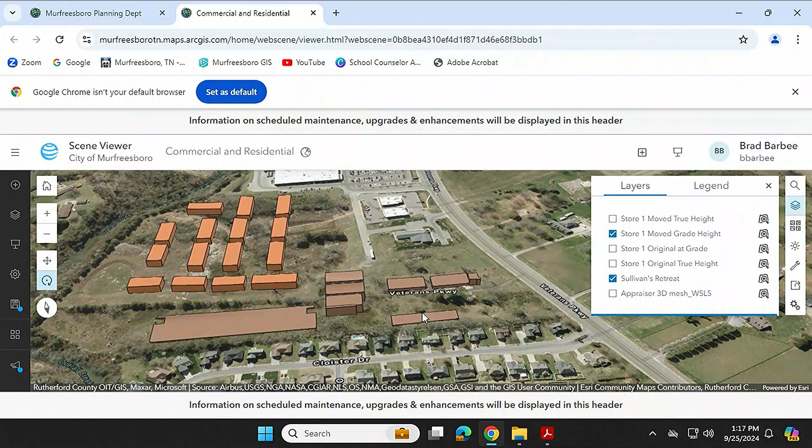They are now providing 100 feet of separation between the cloister and the exterior wall of the self-service storage facility. In addition to providing that distance, our recommendation was also to reduce the level of the building on the side facing the cloister to 1 story. The resubmittal we received was to provide the 100 foot separation and restore the building back to the full 3-story height that was in the very original submittal we received.

Cool. Say that one more time. Are you saying that they're going back to the 3 stories? Yes, sir. The submittal you have before you is for a full 3-story building, but it has been pushed further away from the Cloister subdivision to provide 100 feet of separation.

This image gives you an idea of what this building in the center is, the self-service storage facility. The short structure to the left is the 1-story facility that was previously approved. The structures to the right are the retail spaces that are part of their site plan, and Sullivan's Retreat, which has not been built yet, we have inserted as the orange structures in the rear.

Our GIS department has helped us greatly by producing some 3-dimensional images to give us a good comparison of how the cloister will look adjacent to this. The roof lines of the self-service storage facility do get kind of skewed once they do this. I have confirmed with them that this wall height you're seeing is accurate, and they have requested that you ignore the bizarre roof structure that's shown.

But this gives an image that should reflect how that will appear once constructed, and this is in the new plan. We can give a view from pretty much any angle. If we want to rotate around, there is the Sullivan's Retreat property to the south.

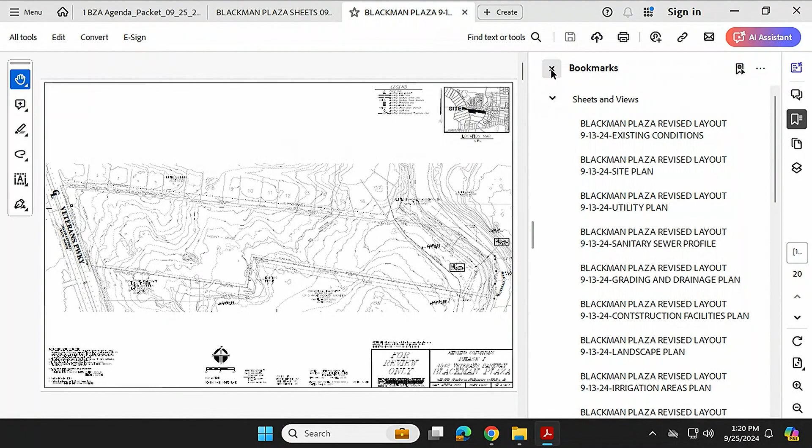Brad, can you remind us of what the buffer is, or any fencing between the cloister and this structure or structures? Yes, sir. They are providing a 15-foot wide type D buffer in addition to a 6-foot tall opaque privacy fence. They are also, with the new site plan, proposing to preserve some additional space and allow them to pull grading off of the northern property line, giving a better chance at preserving existing trees currently in place along this fence row that you can see here.

Actually... oop, that doesn't work anymore. We've also had some adjustments. The loading/unloading area is now on the north side of the building in this area.

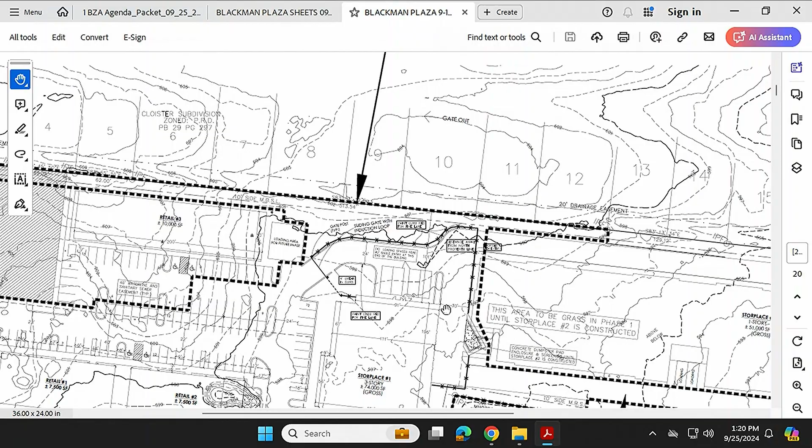So if you should so choose to approve this application, staff does have some conditions of approval that we would recommend: that the special use permit approval is for a 3-story, approximately 74,000 square foot climate controlled self-storage facility; that the applicant shall provide a 15-foot wide type D landscape buffer per section 27 of the Murfreesboro zoning ordinance along the northern property line; and that this BZA approval shall supersede all previous approvals by the Board of Zoning Appeals.

The structures shall comply with the Murfreesboro design guidelines and be consistent with architectural building elevations submitted with this application. BZA approval does not imply approval of the site plan. The site plan shall be submitted for review and approval subject to compliance with the Murfreesboro zoning code and design guidelines. And the owner shall operate the self-service storage facility in compliance with the zoning ordinance, self-service storage facilities additional standards as set forth in section 9D2.

3U: a fire truck turnaround will be added to the site plan subject to the approval of the Murfreesboro Fire Rescue Department. This turnaround must be maintained, or an alternative turnaround constructed and approved by the Murfreesboro Fire Department, during the construction of Storplace 2, which is the building to the east.

Brad, what's this Sullivan's Retreat you keep referring to? It is a planned residential district development. It's going to be residential single-family attached townhome units. So is that going to be to the east and to the south? It'll be to the south. Yes sir, and that's actually a mixed-use planned development. It's got retail at the front of that development, and then townhomes to the rear to create a walkable commercial and residential development.

I've walked through what the proposed project was at the site. We discussed when the meeting was. So those people that made the call, a few of those were actually generated off of the sign that was out front as well. So they weren't all that just received the letters, but less than a handful of calls is what I received.

Do we know where, I know this is getting really technical, but do we know where you said it was mixed use to the south? Do we know where the commercial piece starts and ends? Well, I'm sure it starts on Veterans Parkway, but do we know about where the commercial ends and the residential begins? So if we can get City TV to switch over where you can see my screen, I'm actually pulling up the zoning now, which will give you a better idea.

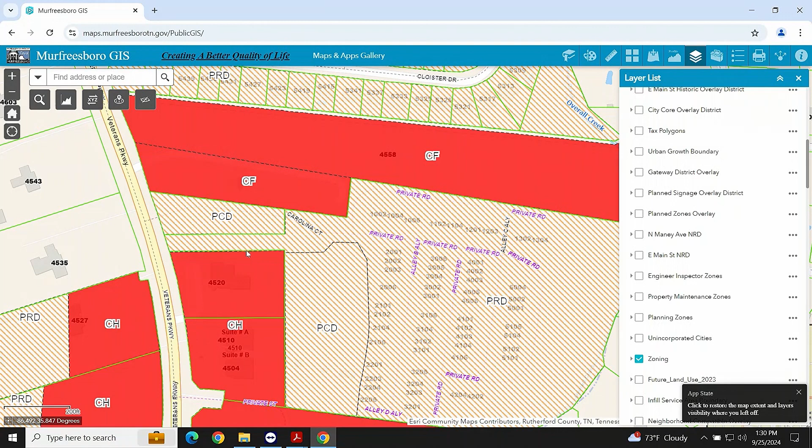All right, so the building that Brad is describing is sitting about right here. You have the PRD section where you can see the addresses on the screen. That's Sullivan's Retreat, attached single-family housing product, townhomes. The PCD that you see there would be directly south of the building. That's undeveloped, there's no site plan approved on that at this time. And then Commercial Highway is out on the front portion of that property to the south.

There's also a small parcel there that's in the PCD as well that borders this property. So this building, approximately where it would be, would not back up directly to any residential units. You would see it about in the approximate location of where you can see my mouse. And the first building is where you see that first address point.

Directly to the south of where the building would be is where there's going to be a new public street called Carolina Court, coming in from Veterans Parkway, that will access the townhomes. So directly to the south of the building is where the bulb of the cul-de-sac of Carolina Court would be located.

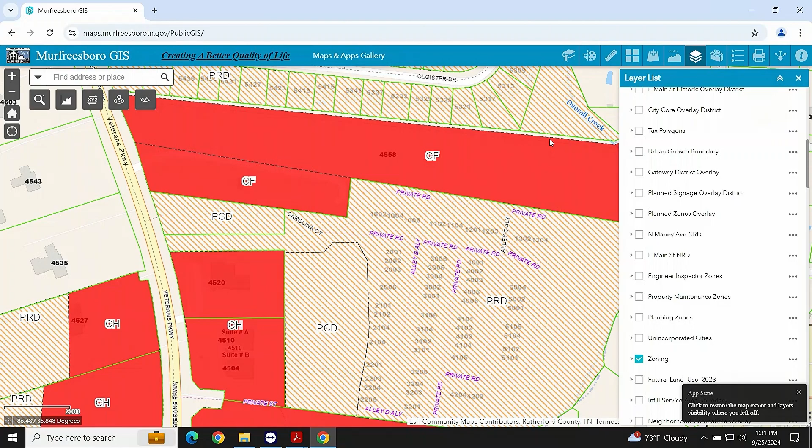My biggest hesitation would be, I don't know what we would have accomplished if we're pushing this all the way back towards the south and we're right up against the residential structures. So it doesn't sound like that's where we're at, so at least we've gained that part of the application.

I'm not real thrilled about the 3-story piece being back in, and in the 2-story, I think moving it and keeping the 2-story on Caroline, whatever it is, Cloister, would be a better fit for this. Again, it goes back to what we talked about before, when this was originally set, having these buildings so close to...

And you've accomplished that, you've backed off of it, you've done exactly what we've asked you to do. But it sounded like you were willing to go for a plan that didn't have as many square feet, and now since we're backing off, we're coming back and asking for more square feet. I know the original plan was probably the amount you're asking for now, and then you compromised.

But if we could keep the 2-story on that end, I'd feel more comfortable with this plan. Yeah, I'll give them a chance to respond.

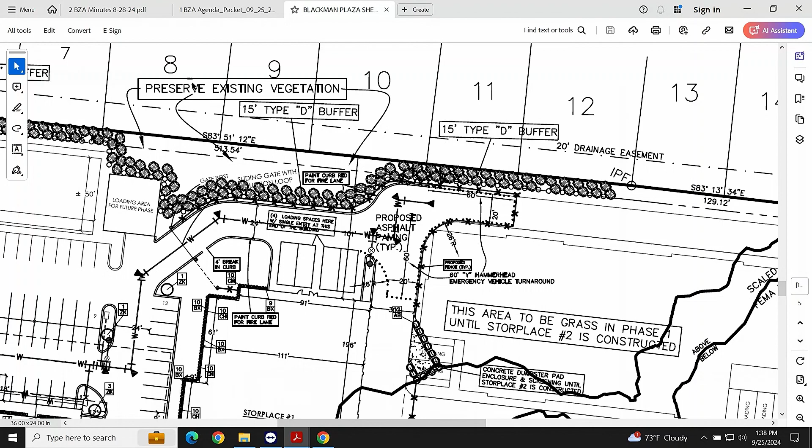Well, yeah, I understand what you're saying, but pretty much half of those houses will walk out on their back porch and they're going to see this 3-story building. Am I wrong?

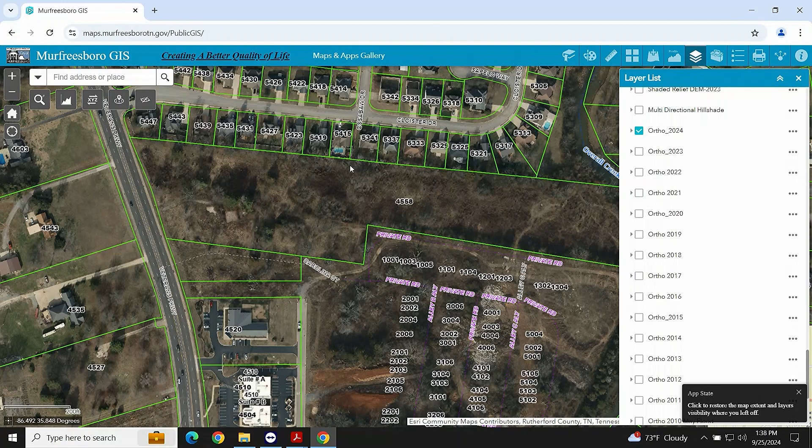I mean, you're saying where the building is, it's going to block, but it's more of a visual than it is the shade. I can't get away from the fact that anecdotally, by virtue of my experiences and the businesses I'm in, having discussions with people about so-and-so facility -- 'if I'd have known that was there, I would have never lived' -- well, these people didn't get that opportunity. So that's kind of in the back of my mind on that.

So without belaboring the point, I just wanted to see what that looked like. Thanks.

My name's Christian Noble, I'm one of the architects working on the project. I just wanted to speak to the building size and shape and what we were trying to do to accommodate the comments received by staff and at the last BZA meeting.

Originally we had submitted, based on typical zoning regulations, a 3-story building within about 40 feet of the property line. Based on back and forth with staff, the request was made to step the north end of the building down to 2 stories. That 2-story building was still within 40 feet and had the minimum 15-foot buffer at that end.

What sort of buffer is there as it's scooted? I guess, can this image be shown? Okay, is that what you're after, Chair Young? Roughly, right.

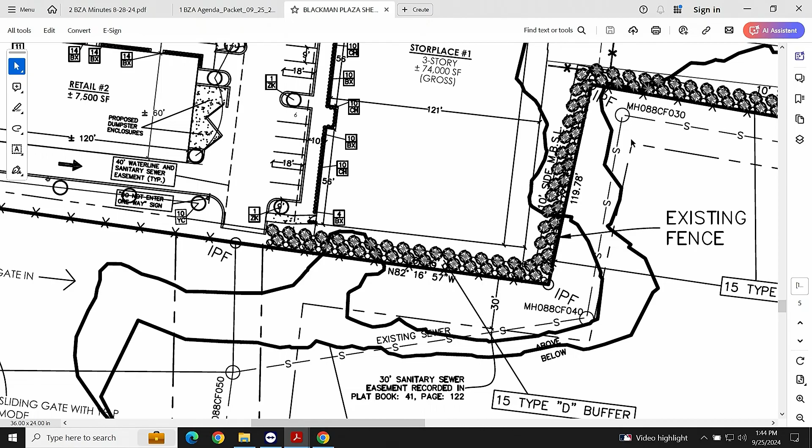But that's probably a minimum setback from that side, and 3 stories. Granted, that might be the road coming in there, but maybe. It says 10-foot side setback—is that what we're dealing with?

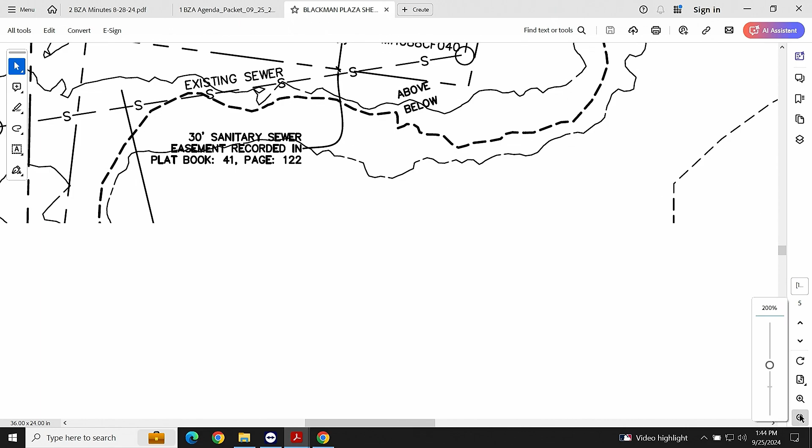Not sure if they have it labeled. There's approximately, I believe, 20 feet between the property line and the building in that corner. Let me see if I can find it—yeah, it's 20, it's labeled.

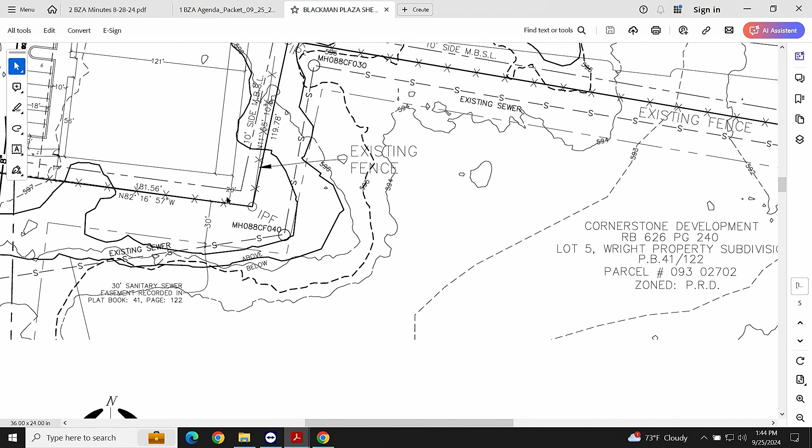You might try that 3-dimensional view the GIS prepared, that shows where the residential buildings are. Yeah, it doesn't show property lines, but it gets fairly close.

Was the question about the buffer type? Just thinking through, not a specific question. My thought was, while we honored our request to help the north, did we create an issue on the south if there were homes there? There aren't, so I don't know if that's something to worry about, but I was weighing the pros and cons.

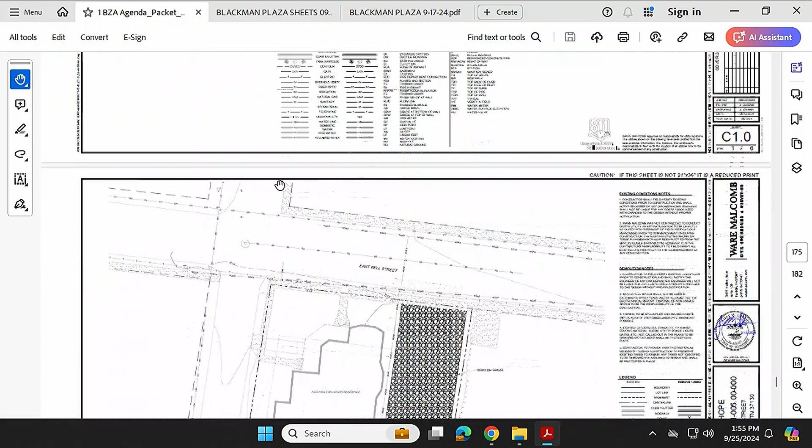It's not shown on their overall map, but there will not be any anticipated changes for the property at 434 East Bell Street. The surrounding land uses are OGR and RSA to the west, OGR to the north, and CMR to the south and east. So there's a mixture of residential and institutional type uses here, operated both by Doors of Hope and MTSU to the east.

As shown on the attached elevations that I'll scroll through here, the proposed addition will continue the same architectural character of the existing building and neighborhood by utilizing Hardie board siding and shingle roofing. The proposed addition will look and function as a single-family detached dwelling unit.

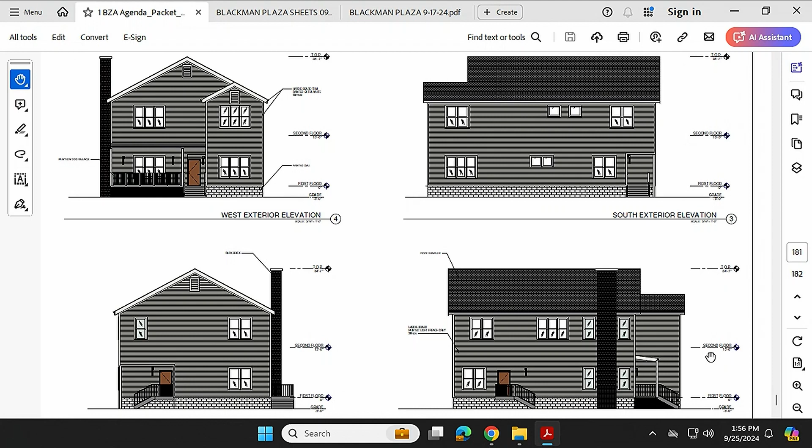The height of the proposed addition is 34.7 feet, which complies with the height standards of the OGR zone district. The location of the proposed building addition does comply with the setbacks for a property zoned OGR and located in the city core overlay district. This property on East Bell is located in the city core overlay district, so there are different setback standards which allow it to encroach a little further to stay consistent with the neighborhood, and it does comply with those standards.

Under the OGR zone district for offices and other uses, this is not residential, this is not office, this is an other use for a transitional home. There is no maximum lot coverage requirement. I know the site plan seems pretty substantial, but staff was able to review this use and the property, and since there is no maximum lot coverage, they would be able to build up to the square footage they're wanting.

Staff and the applicant worked together to ensure that parking and circulation would be managed efficiently, and the design of the site would be handled correctly, so it would all be contained on site.

The zoning ordinance parking standard for transitional home use requires 1 space for each 3 beds, or 3 spaces, whichever is greater.

In the existing structure, there are approximately 8 beds, and with the proposed new structure being constructed, there will be an additional 8 bedrooms, for a total of 16 beds.

So per the parking formula in the zoning ordinance, they are required to have a total of 5 spaces. As you can see on the site plan, the applicant has proposed 2 spaces plus ADA spaces, and so what the applicant has proposed is a parking agreement.

As you can see on your staff report, on that first page, we've gone into detail of that parking arrangement.

The applicant has proposed a parking agreement as a solution to alleviate the constraints they feel the site faces. Because this is a corner lot, they will have to do the parking, the landscaping, and other on-site improvements required with this expansion.

Per Section 26 of the off-street parking, Section 3 of the zoning ordinance, joint use of the required off-street parking spaces between 2 parcels can be approved by the planning director.

Doors of Hope has prepared a joint agreement between 434 and 428 East Bell Street — that property located across the street — to allocate 2 of the required 5 spaces to be located on 428 East Bell Street.

Staff has reviewed the request further and determined that the agreement is compliant with the requirements of Section 26. One of the requirements in our zoning ordinance is ensuring that when an applicant proposes a parking agreement, we're not taking any of the adjacent properties' required parking spaces.

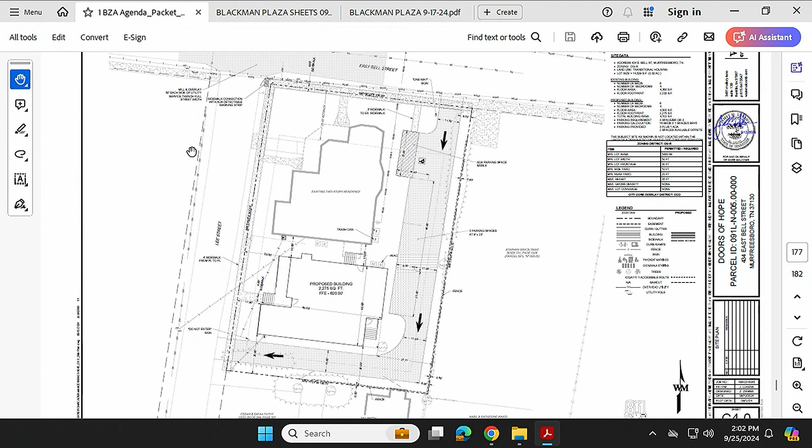There are no historic or rare natural features located on the site currently. Staff is not able to identify, and the applicant is not aware of any at all, so there will be no destruction or harm of any of those types of features.

Again, there are no additional standards for a transitional home use, and staff believes the applicant does comply with the general standards of applicability for a transitional home use and to expand a transitional home use. Staff recommends that should you approve this special use permit based on meeting these standards, it recommend approval based on the following 2 conditions listed in your staff report.

I'm here if you have any questions. We have somebody from Doors of Hope as well for any questions. Mr. Jim Lukens, the engineer who did the site plan, is also here for any questions you may have. Thank you very much.

Any questions for Mr. Aguilera now? I got one. I think we asked this a lot, but if we approve this special use permit for this transitional home, does this special use permit end when, if and when there is a subsequent owner of this property? Is that a correct statement?

So if there's a change of use of the property, that is correct. We would look- I'm not saying change of use, I'm saying change of owner. Change of owner. Yeah, so we would look to see who that owner is, but if there is a change of owner, let's say a different nonprofit comes in that wants to use this property, we would see what type of nonprofit organization they are proposing, and whether it's consistent with this approval. If not, then I think we would probably say that necessitates a different type of application.